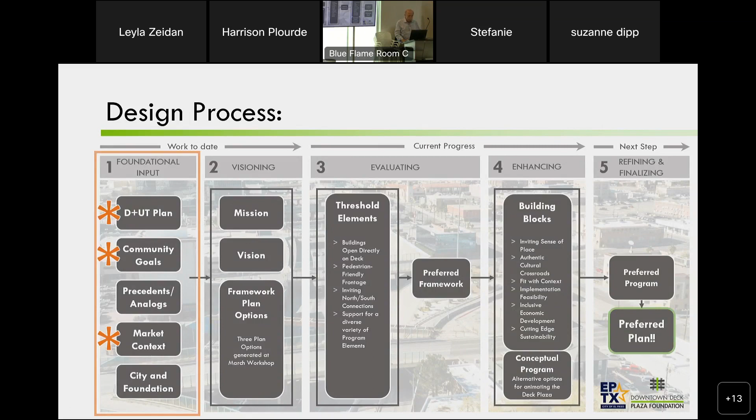I want to start with some of the key takeaways that my colleagues and I've had the honor and pleasure of working with, certainly some of you, to lead the downtown plus uptown plan. There are a couple of really strong messages. One is, and the foundation's done a great job pointing this out, to not just strengthen but reinvigorate and recreate the strong and even more vital connections between neighborhood and downtown, and neighborhood and neighborhood.

So this is a place you just walk to, and you love the walk and you love the destination. It's to enhance downtown itself, to play the kind of leadership role as the heart of a multicultural community, but also an even stronger economic engine to help create opportunity and equity across the board for all El Pasoans. This requires enhancing a deck that helps enhance downtown as a place to live, work, play, learn, interact, and innovate. And maybe most important and key to all of these, creating a really robust multicultural destination for the city and region. This isn't just about the neighborhoods in downtown—this is about everybody in the city and region.

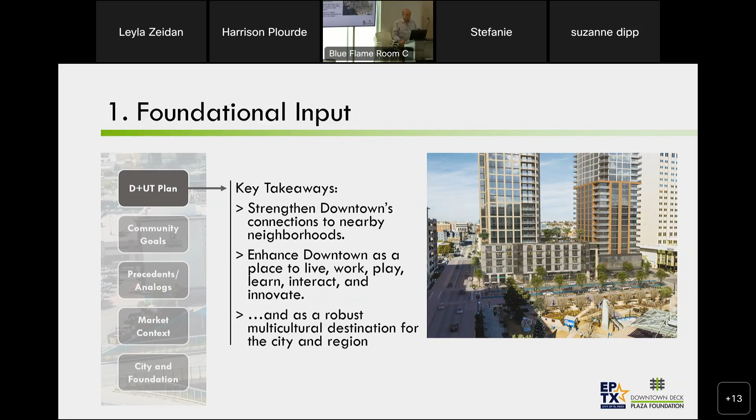And why don't you take over?

So the second important foundational input that we had was the content we got from you all. This came from the public open houses, from the previous CAC meetings, as well as from stakeholder interviews that we had. There was quite a wealth of information that we gathered.

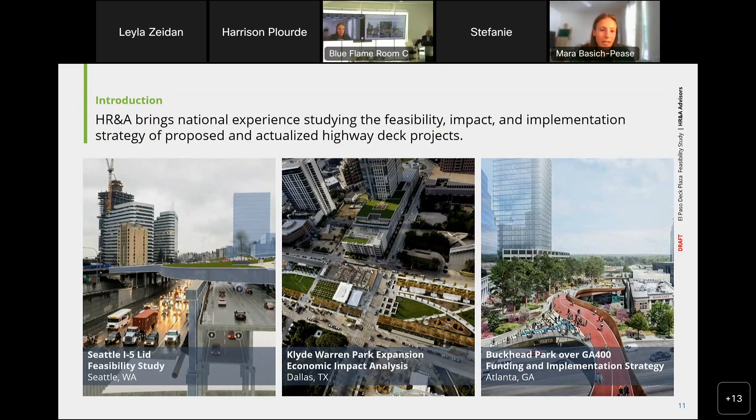Throughout this presentation, I'll talk through a few different sites.

So there's a few different sites that we looked at to contextualize the deck, and the Deck Park, of course, we know is in that dense area of the I-10 in the middle of our study area. For the study area, we selected sites within a half mile on census block group, which is too detailed for you all but helps define this wide area. Downtown is a collection that EPS looks at for the study as well.

Some of the work we were doing was building off of previous studies we know have already been done in this area, making sure we're not duplicating efforts. So you'll see the study area, downtown, and how we compared it to the city. I also wanted to note that in the uptown downtown plan, there was a downtown market identified by Stantec that closely aligns with our study area. So just for consistency, we'll say study area throughout this presentation.

We can keep going. So to start with, I'll talk through a few of the most interesting demographics findings that we've been looking at as a team, reading into what that might mean for demand, for trends, for who our existing residents are, how we're taking care of them, and what it means for growth implications.

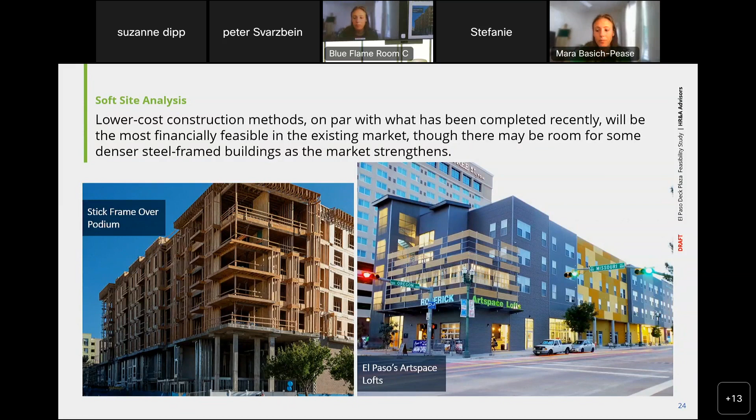So when we look at it all together, we're projecting that just at those sites immediately adjacent to the Deck Plaza, about 10% of the multifamily demand for the entire study area could be located on those sites. And that, again, is mixed income units. So we're going for the 2/3, 1/3 market rate to affordable within those units.

We see some demand for office space. Maybe one of the buildings or one of the sites would be an entire office building. And then for retail, we added some ground floor retail into our assumptions for a few of the office or multifamily spaces. So again, kind of that Artspace Lofts model of ground floor amenities with residents up above.

I think we have one more slide where we talk about what's next. So where are we going with this?

A lot of what we're thinking about within development is how we can use investments like the Deck Plaza to create value for the entire study area, the entire downtown, even the entire city, and use those developments, whether by pace or by increased value, to actually put money back into operating not only the Deck Park, but all of the different money that we already know is in the TIRZs for downtown, can contribute to ongoing initiatives like the Museum District.

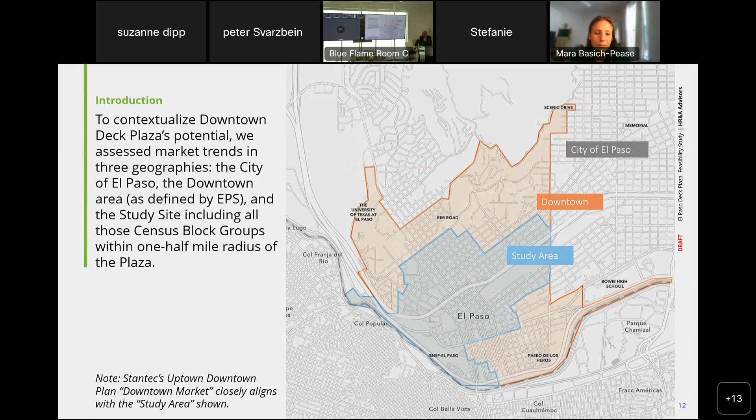I think someone raised their hand online. Yes, go ahead and ask your question. Yeah, this is Peter Svarzbein. Can you go back to the map that shows the sort of plots of land in the navy blue? Is this one? Yeah, see it? Yeah.

So I just wanted to comment that one thing I think would be important for this study in terms of next steps is what could be offered - because you talk about TIRZs, but what other policy-related initiatives could encourage responsible density, mixed use, and affordable housing here? I know the Housing Authority has, probably a block or two away from this, an affordable housing project in Western Sonora that's broken ground and is currently being constructed, as well as the Blue Flame building about 5 blocks away. I think that's an important part of this, to help advise policymakers about what could be looked at further in terms of encouraging responsible density and development around this area.

I also think, to the point about the fact that this is already an area with one of the lowest percentages of car ownership, as well as helping to bring back neighborhoods that were separated from the introduction of I-10 in the late 60s, is an important component of this project as well. Not to mention the need to make something family oriented that celebrates the culture and people in this very unique part of the world. Thank you.

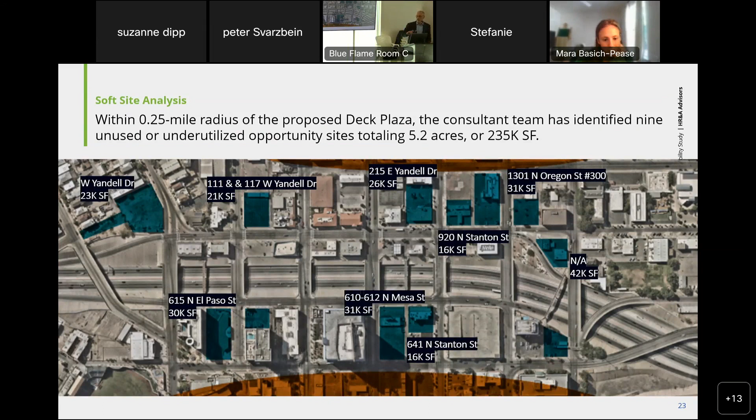We'll send out specifics that literally identify the extent of the gaps for development like this and how to fill them. Thanks for that input and for the questions. We should keep going, and if you have additional questions, make a note of them and we can follow up afterwards. So with that, I think it's time to introduce Maggie, right?

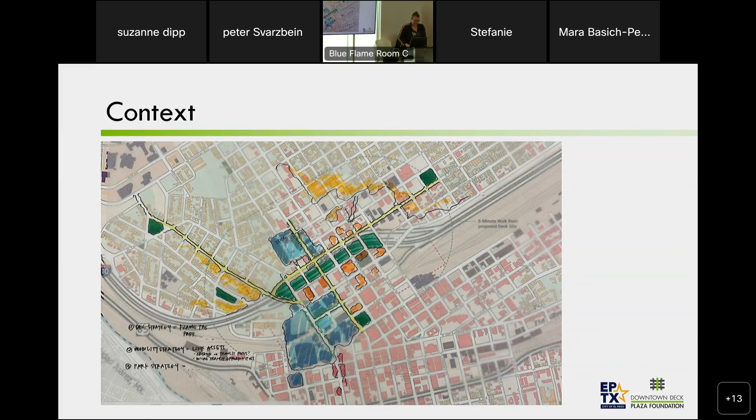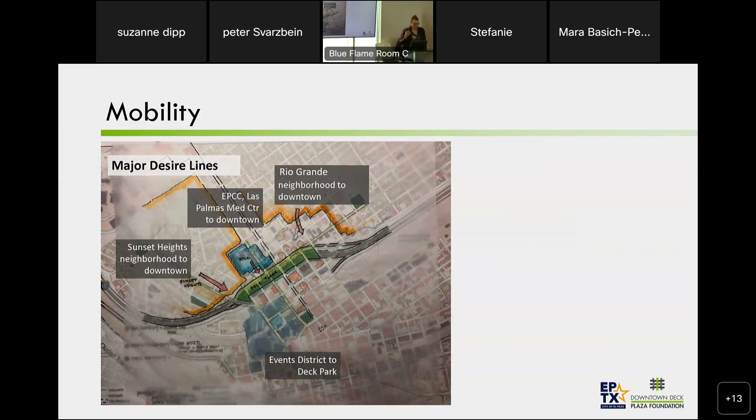We talked a bit about connections, specifically looking at mobility and trying to understand how to better connect not just to the deck—on foot, on bike, through transit, and from the broader area—but also how to connect across it.

So we talked about finding ways to prioritize bike linkages on key roads. We talked about transit priority and really beginning to aggregate and celebrate transit.

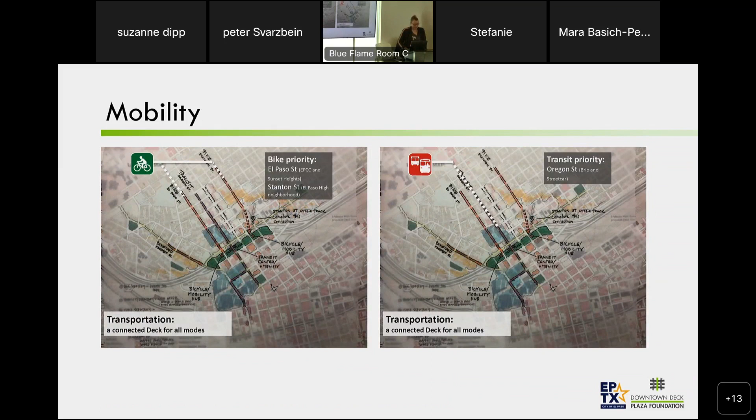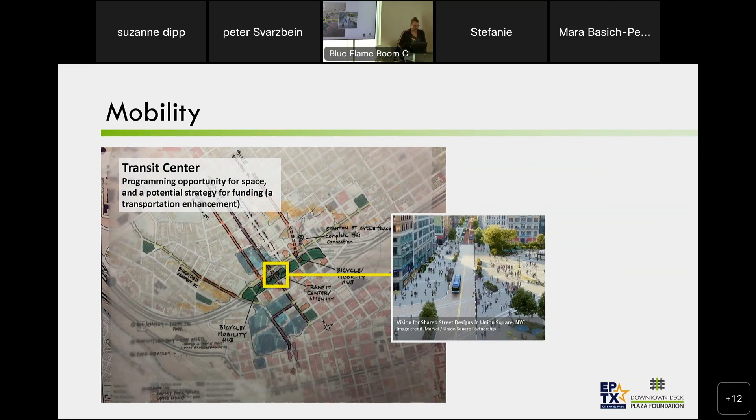Specifically, we looked at biking along Oregon and El Paso and Stanton. The idea is that maybe we could begin to build something like a transit center, a hub here that could really help connect people. This gets at the point of getting some cars off the road, providing other options, which is a real transformation, going from being a highway to a place where people can use other modes of transportation.

We started to look specifically at pedestrian access and different ways to design intersections and design the bridges across the deck to make them more pedestrian friendly.

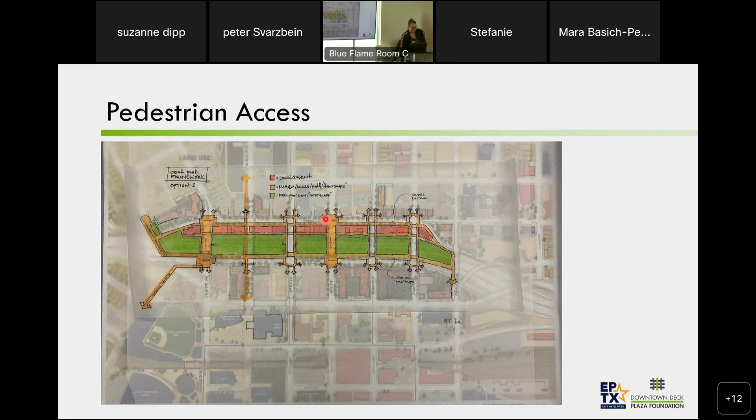We looked at shared use spaces, and connections that could really begin to straddle and form uniform spaces for programming in different ways, so that we could connect the north to the south.

We also started to talk about early programming concepts, and we're going to get into that much deeper tonight, hopefully with a very robust discussion. But we looked at different ways to activate the deck spaces.

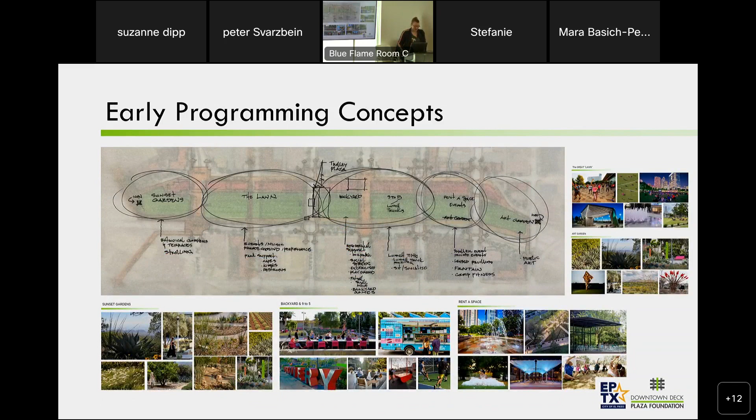And then we started to study different alternatives for how the deck could lay out, where the deck would exist, where existing buildings exist, and how they could interact. So we looked at a variety of different frameworks, is what we're calling them.

The first one is really looking at keeping the surface condition that you see today very much the same, regardless of what TxDOT does with the underground surface.

This is an idea where we are keeping all the north-south street connections, where Yandell and Wyoming are designed in such a way that they are pedestrian friendly, where existing buildings along Yandell are retained and can exist in the new plan. We also looked at, over time, if those individual property owners so chose to redevelop their sites, how they could engage with the plaza in a different way, and how they could be part of this housing discussion and this activated ground floor discussion.

We looked at options where, if TxDOT were to take those properties, what would that implication be? What would that look like from a deck plaza configuration, and how much space would that be, and what would we have to do to make that successful?

And then we looked at also different ways to think about facing adjacent buildings surrounding the deck plaza.

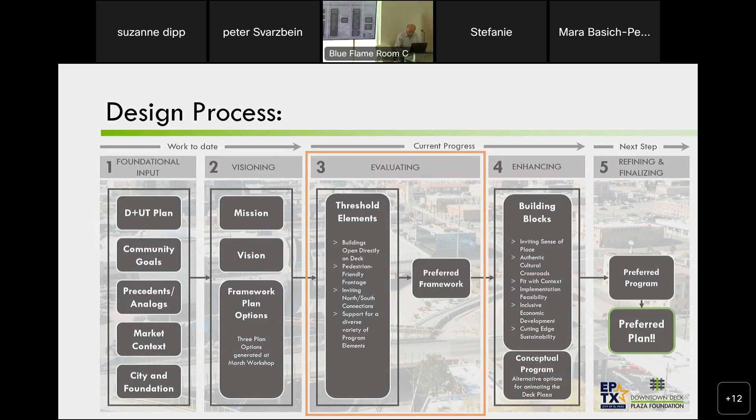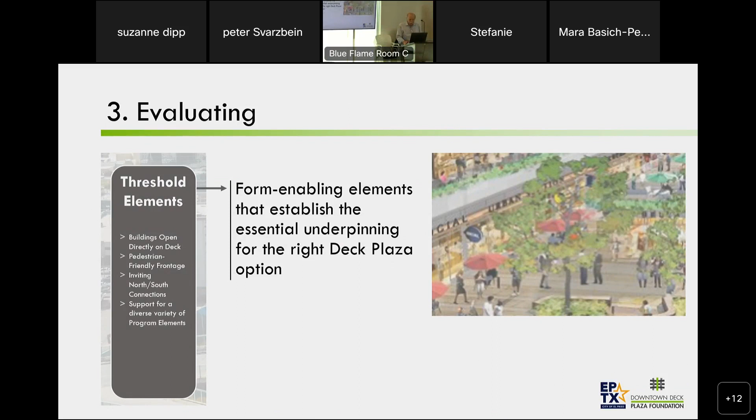We've talked about foundation in one sense, the foundation you've given us, your goals and aspirations for the deck, what we've learned from market analysis. There's another way to use the word foundation: what kind of deck do we need to build in terms of how I-10 is configured underneath it and the structural support it has. There are form-enabling elements, thresholds we need to achieve to unlock the kinds of opportunities Maggie just talked about.

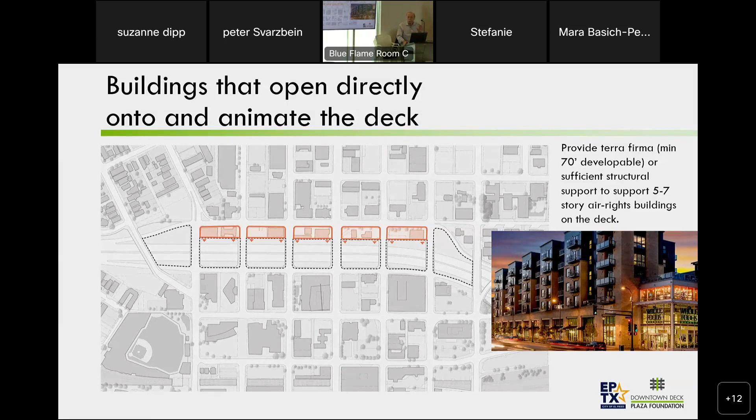We have a series of parcels. The first is the gold standard of air rights: deck plaza, public realm, buildings that aren't just across the street from the deck but actually open their doors and spill out right onto it, whether restaurants with cafes or cultural programs with organizations upstairs and downstairs welcoming people and spilling out activities. So either we need natural land we can build on, or the deck needs to provide enough support so we can build buildings that directly open their doors onto it. Does this all make sense?

Thank you, Luca. We need pedestrian-friendly frontage streets. That means streets that aren't just crossable, but invite being crossed. Don't think of 3-lane mini highways on either side, but nice urban streets that invite crossing.

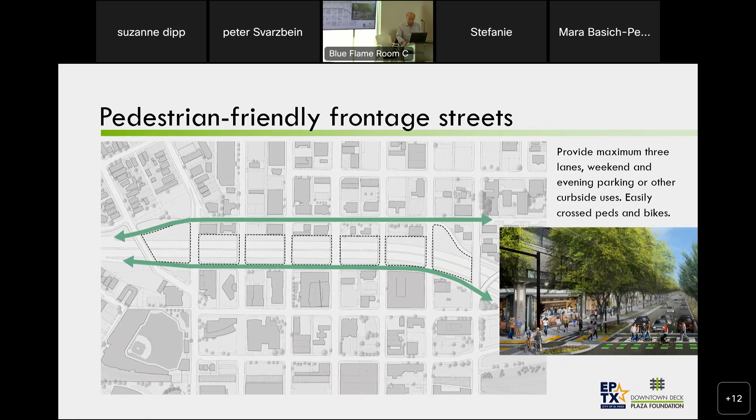I also want to remind some of our colleagues how important connections are. This talks about extending, making sure there are street trees, shade. We fill in the development holes for several blocks on either side of the deck to encourage walkability to it. But you reminded me that one thing we learned in the Uptown Downtown Plan is that a large majority of new housing in the neighborhoods near and in downtown can be built within a 5-minute walk of bus, rapid transit, or streetcar.

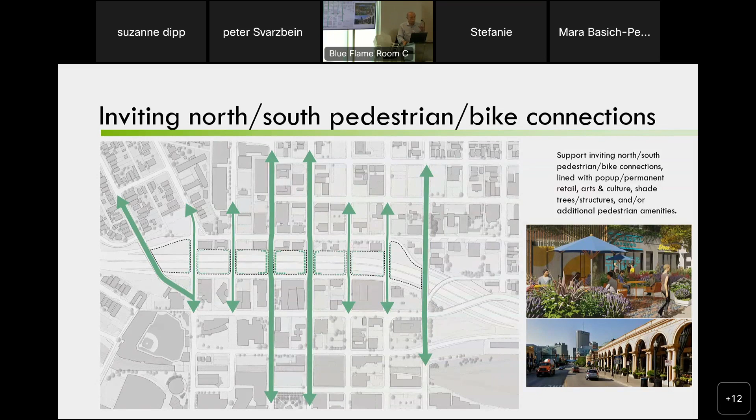We can actually increase the frequency of service and convenience of both by increasing the number of households that they can serve.

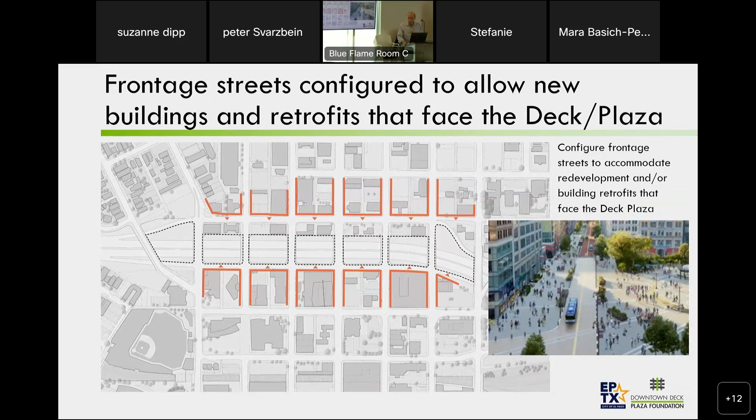As Maggie said, we need streets on either side of the deck that really invite retrofitting of buildings that currently back toward the deck to turn around and open to it, and to create new development opportunities not just right on the deck but a block back that really honor its importance to the city. This is the city's next great place. It should be surrounded by the city's next generation of buildings.

We need enough support everywhere on the deck so we can have soil to create a high desert arboretum, play fountains for children, places food trucks can drive onto for special occasions, lightweight one-story marketplaces, and spaces where large numbers of people can gather for a concert. In other words, it can't just be a deck you walk across—it has to be a deck you can play on, enjoy, and interact on.

When you all meet 20 years from now, I hope you can meet with us, but with somebody, you're going to have different ideas about what should go on the deck. So we need a deck that's adaptable going forward to changing uses as our society changes.

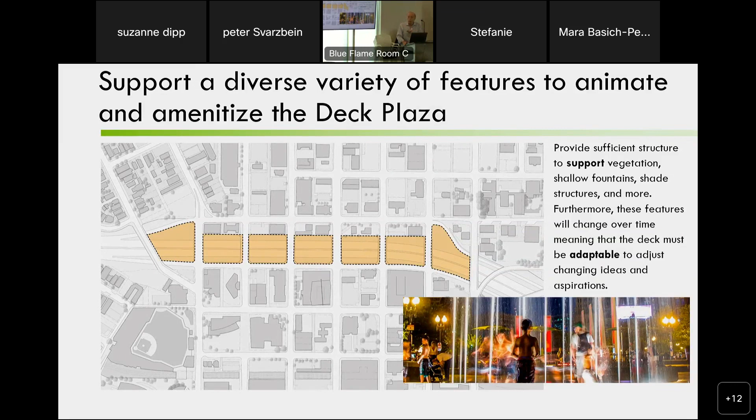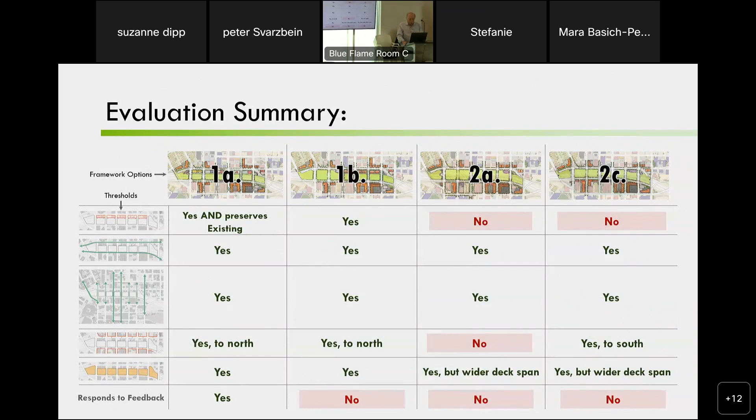When we look at the alternatives Maggie talked about quickly—1A, 1B, 2A, 2C—it's pretty clear that 1A, the ability to line the deck with either current or new buildings that open onto it, makes a determinate difference in terms of the threshold foundation we need to create as I-10 is planned and configured. Is this all making sense to folks?

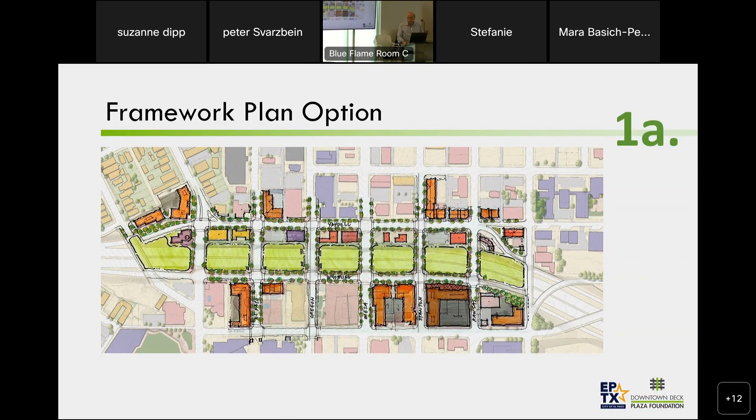Okay, thanks. Now let's talk about, we have a foundation, what are we going to put on it? We'll start, since we're very linear here, with principles. We call them urban design building blocks that talk about the goals we need to achieve if we're going to honestly say we achieved what we started out to. The first is a place that can be a real cultural crossroads. A cultural crossroads is not something with pictures of historic El Paso on public art.

It can have that, but we're the living culture—folks who make food, music, art, design the coolest clothes about their tradition—can all come and do business. That means we need buildings opening onto the deck, a deck that can support temporary structures to house these folks on a weekend when they come to do business, and places where we can have concerts. In other words, we have to make the goals real, and that's what these urban design building blocks are about.

When we talk about enhanced connectivity and accessibility, that means shade trees extending several blocks in either direction to invite people to walk to the deck in the first place, so they don't drive. We also need a deck that supports maybe a marketplace at Oregon and Mesa—two very important streets—and pop-up structures elsewhere, so you don't just walk past hundreds of feet of deck with nothing happening, but can grab lunch, hear music, buy things, see friends along the way.

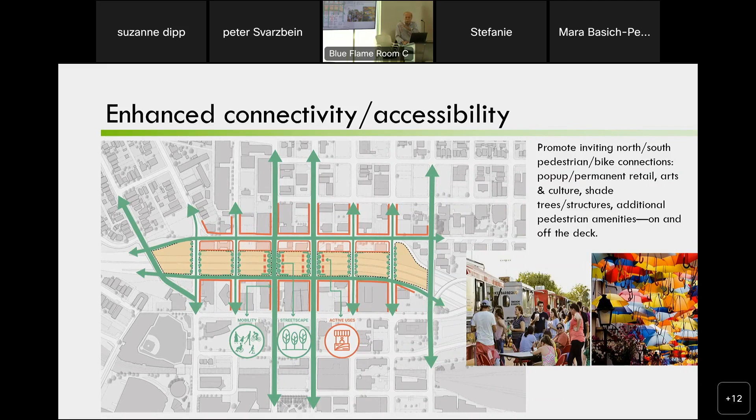We need something that fits with the downtown context—programmed in ways that relate to the Children's Museum, the Art Museum, and other things happening around it. You'll hear a garden proposal that relates to Sunset Heights, for example, reflecting what's happening around it and enriching those things.

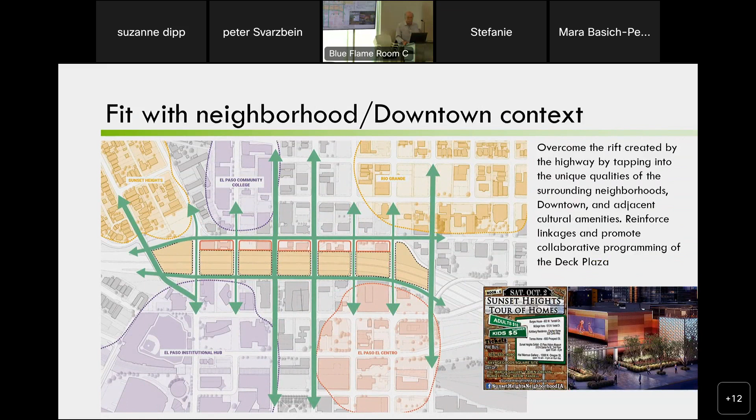It needs to be a place of inclusive economic development—we've addressed this a number of times, and there are two particular ways this can happen. One: lots of places where entrepreneurs who've had a dream all their lives can come and open a business because they get some financial help. There's a pop-up structure that didn't cost very much to build, so they don't have to invest heavily to be here, and they can come and try starting a business.

We could have pop-up restaurants—what's the term—a ghost kitchen, where various folks can use the same kitchen without the necessary investment. These are ways to really empower people in starting businesses and bringing their entrepreneurship to a place where lots of people will see them. But we also need to make sure there's a range of jobs, and organizations that train people for these jobs so they're accessible.

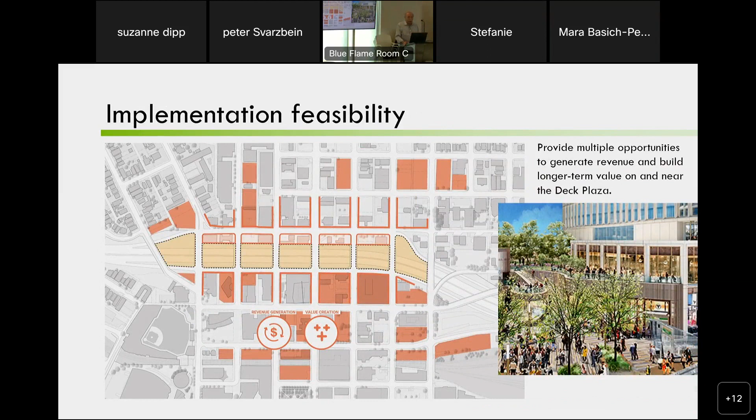Again, this is all about making the dream real, and what's more important than real implementation feasibility. You'll note this slide looks a lot like the one before it, because it's the same structures, the same opportunity to bring commerce to the deck that promotes inclusive economic opportunity, which will also allow us to generate increased value over time to pay for all of this.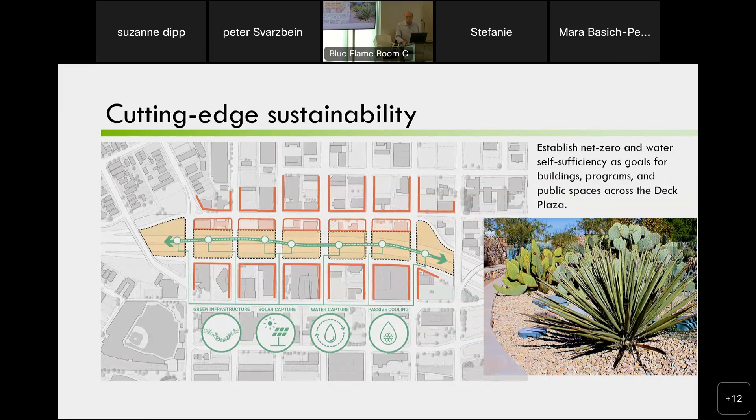And of course, we need cutting-edge sustainability, and we can do that with any of the options—whether it's recirculating water or electric generation, solar panels on top of a shade structure. This needs to be state of the art and a symbol of El Paso's sense of environmental responsibility.

So to give you a sense of bringing this to life, we did a couple of quick sketches—and maybe more important, I hope you'll like the sketch. This is just one quick sense of what it would be like to walk down Oregon and cross the deck. More important are all the things embedded here, whether it's childcare, a music cafe, or a place for cultural organizations or food trucks to show up, where they'll not only enrich the place, but the place will give them a chance to operate a business.

A transit center to encourage all those folks who live within a five-minute walk of transit to use it. Children's play activities that are also public art. You'll all get a copy of this and you can read it.

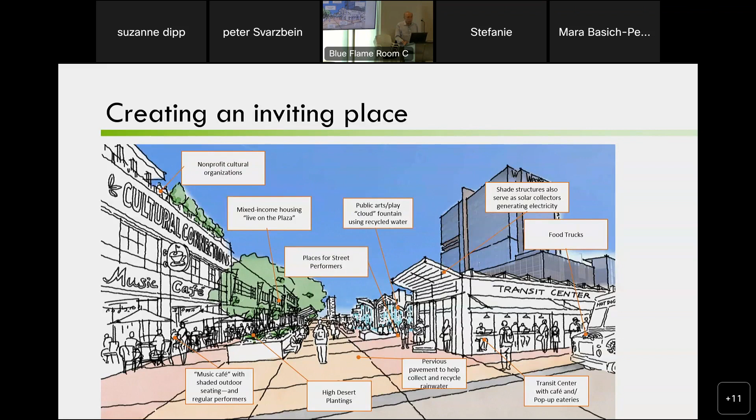I hope this gives you a sense of the goals underpinning what we're going to continue to talk about going forward. Does this all sound like what you thought you were here to do? Just say no if you mean no, but I hope you'll say yes.

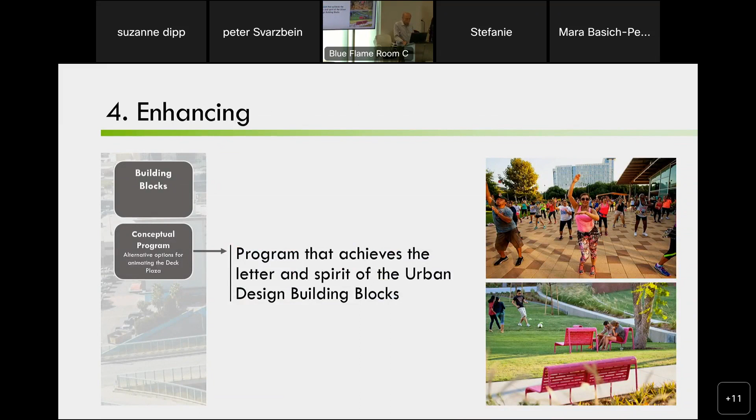All of this is to say that where this programming has started has been through a lot of community feedback, and then through the benchmarking and foundational work, to understand what program elements could work here and what the mix of it is.

One of the things we really want to get your feedback on today are the kinds of things that can go into this deck plaza. What are those things that make this feel truly like El Paso? What are those things that celebrate what it means to be from here and about here?

We're also starting to think about what are the things that are your everyday activities, what's your core programming, and then what's happening weekly, what's happening monthly, what's a special event. Because the idea is that it's not just the physical planning that goes into this, but the ongoing programming, management, and maintenance of the deck plaza and the uses there that really enliven it.

So when we talk about things like safety and inclusivity, that is really keyed, I think, to the programming of this space.

The other thing is that we're also thinking about the sustainability opportunities here, which has everything to do with it being a sustainable site, access to public transportation, multimodal options, the idea of capturing what stormwater you have, and potentially capturing what wind energy there is. There's quite a lot of wind energy.

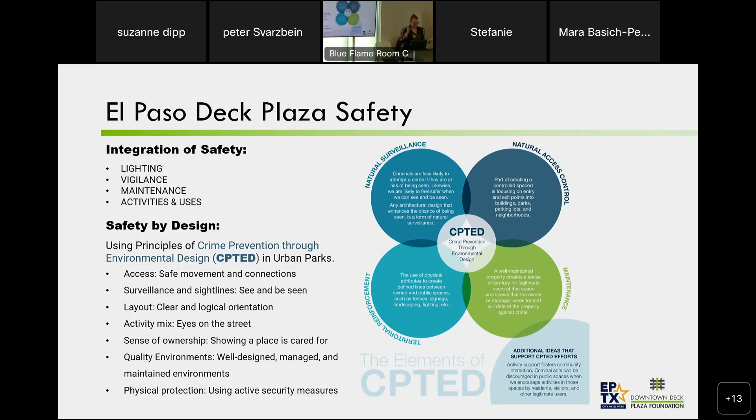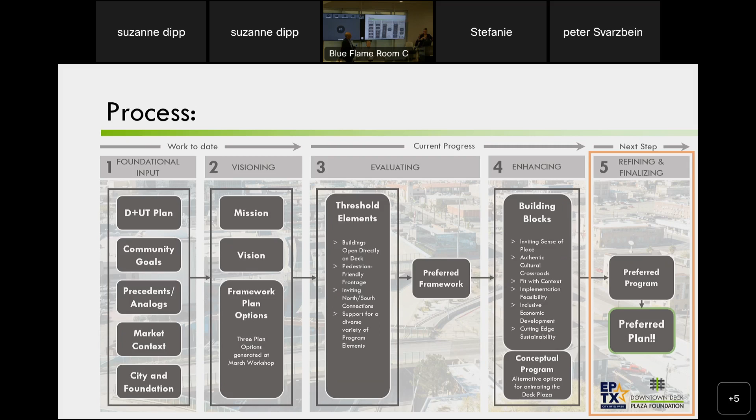And I think, to Pierre's point too, this is why continued participation in comprehensive planning and park planning is important, because so often in projects like this, neighborhood parks get pitted against a regional park, instead of thinking both and.

You know, technically for a region like this, both are important. You should have regional park spaces and you should have neighborhood park spaces.

To build on that, so there's comments here. One of the things that's been very intriguing to me, I have to say, the spirit of when we first started the uptown-downtown plan and folks said, what's this deck? Is it just

the bait and switch - take the deck, oh, then you have to take the I-10 with it. I thought, well, what's the point here? And I've really gotten excited about what the point can be, what the opportunity can be, what the potential could be.

And one of the things I hadn't thought about until listening to a couple of you tonight is this will be a downtown-wide park, a place to come together that will not be in competition with the kinds of things you're talking about, because we're talking about looking at ways to fund this as a deck that is independent from the parks the city is providing across the city.

This is something that is looked at as being funded by the value it creates, which can only really happen downtown.

In turn, I want to come back to your mental health argument and add a slightly different dimension to it. One of the challenges I see in cities I work in is the increased fragmentation around race, income, and age. People live near those who are similar to them, spend time with people similar to them, almost no matter how you cut it. There's an increasing need for common ground that brings everybody together. Maybe it's once a month, not every day like a neighborhood park would be, but places that really attract the full spectrum of who El Paso is, and create ways to encourage interaction. That to me is one of the fundamental gaps in many of our cities, and to some extent in El Paso today. Is that fair?

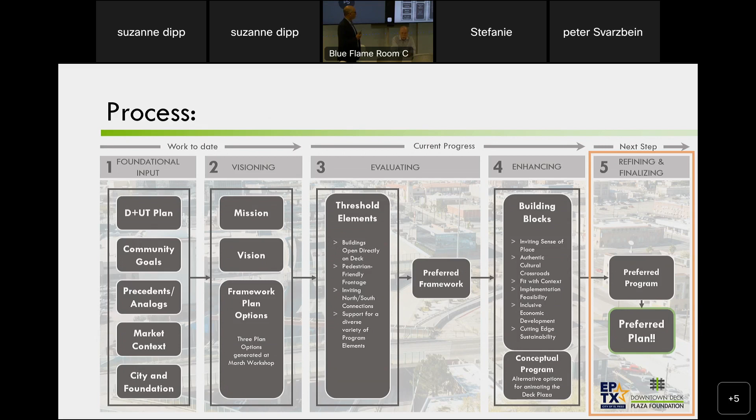That's something the city has asked TxDOT to look into, and I think it's very relevant to additional comments for this project—what do those streets look like, Wyoming and Yandell, in terms of how they interface with the deck park and surrounding streets. To give Joaquin some credit, the first thing he ever said to us when we started the uptown-downtown plan about the deck was: there'll be a separate process, but what we care about is having good urban streets on either side of the deck.

And we're going to have to let that be the last word.